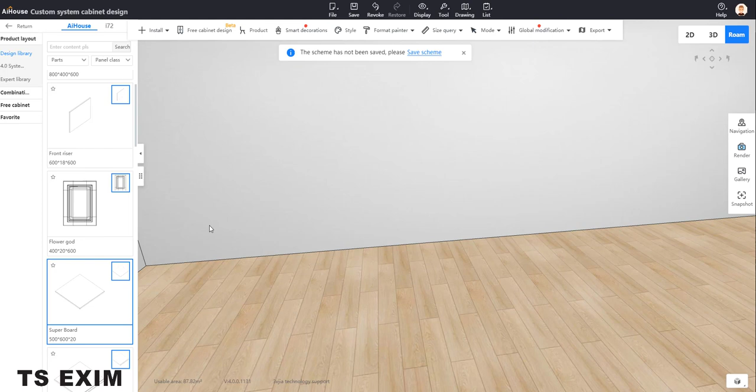You just click here, this one, superboard. You drag the superboard, point on the wall first. Okay, so you rotate it first. Maybe you press X. Select the banner, then you rotate it.

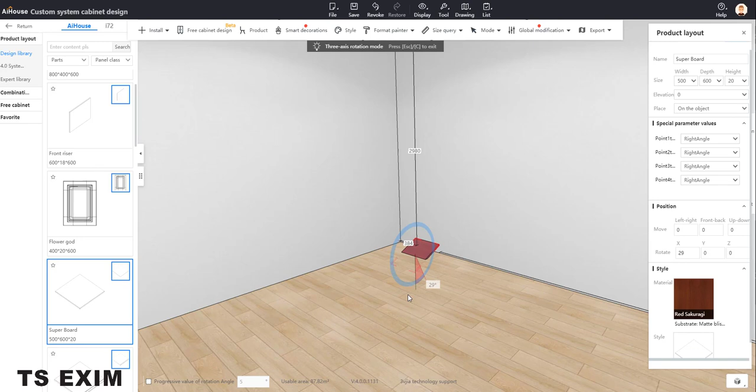Click on red color, rotate it. X 90 degrees. Then press Z to move it up.

So this is the height, this is the depth, right? So this one should be here 500 and 600, so I make it 3000. Right, 3000.

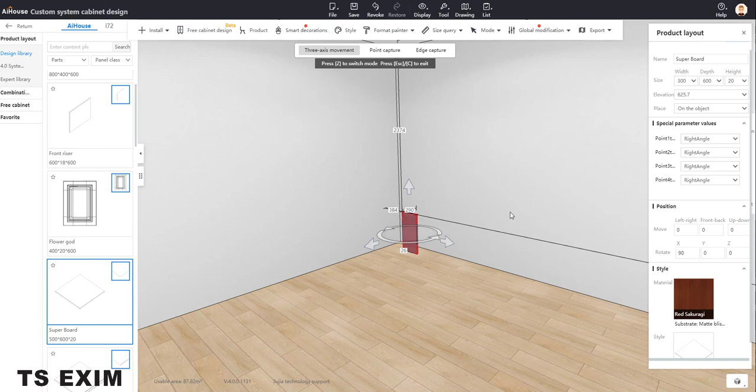Exit first. Okay, the width I make it 3000. Enter. So this one, the depth I make it 3000 also. Get roughly the angle. So this one I make it 0, then you will stick to the top.

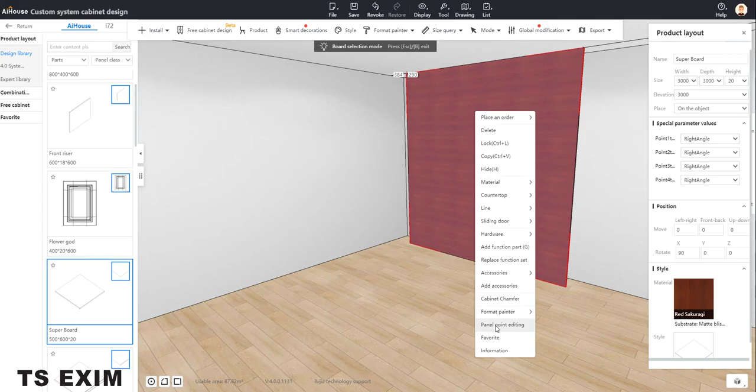Okay, then I'm gonna cut the pattern now. Simple. You just click on board selection. Select it, right click, then go to panel point editing.

In panel point editing, we're gonna use draw, but first just delete this one. Delete the area, then we draw by ourselves. So we click here, then I'm gonna draw from here to here. Roughly the banner, draw the banner until here, like 100. Okay, this is the banner.

You can do here and cut here. Then you see the banner here. So this is the banner, and you can cut the pattern.

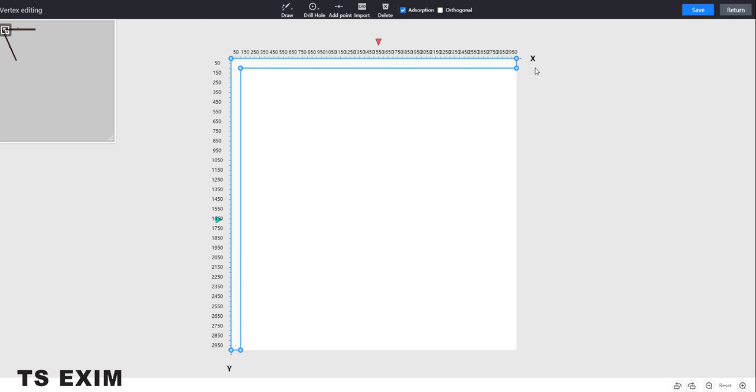So let me check with it first. Okay, the pattern should be here, right? I click back the pattern to check. Okay, it's a curve here. This one is rectangle, I'll just curve these two areas only. So I'll just curve it.

Click here, then you can make curve simple. It's very easy to use. Click here only, so curve already. Then you save. Simple as that.

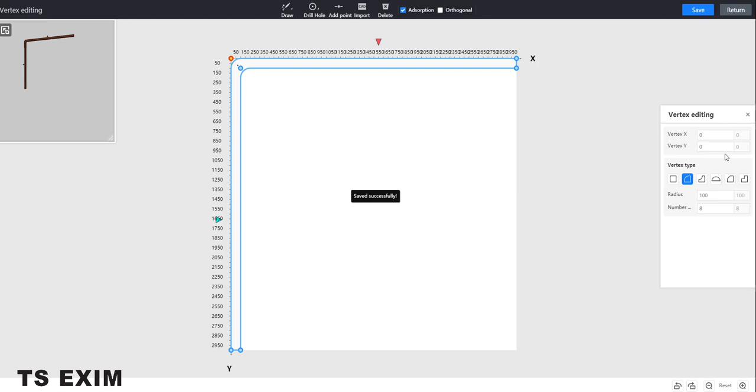Return. So you click on this pen. Exit first. Click on this banner. Make the size, so this one I'll roughly make it 3000 also. Then you can see the pattern now.

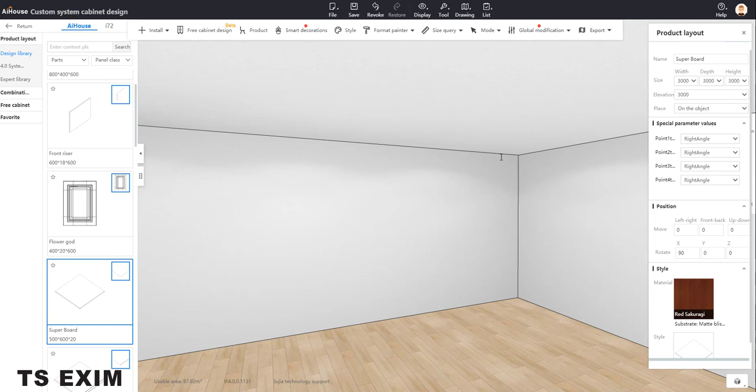So I make it 0, then let it stick to the wall. Okay, this one I make it like 2000. After that, 2000. Simple as that.

Okay, now I'm gonna add another one. Let me check with this. So we're gonna add the cabinet. Add the cabinet, simple, you just drag only.

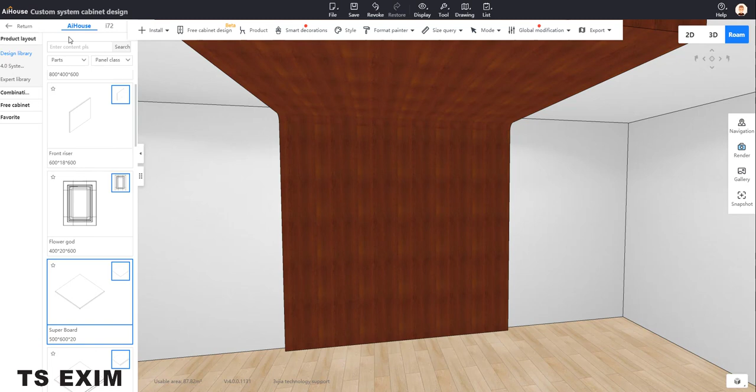Very simple, you click here, basic cabinet. Simple, just drag this one, cabinet. Then you move it first, make sure you're in the right angle first.

So maybe this one I move it, come out a bit. Yeah, so you see the gap, right? And this one banner I put it 100, so I put 100 here, so it stick to the wall. Then you just make it go out.

Maybe this one I put like 2800. 2800 maybe too much, so I make it 2500. So the banner, or the wine cabinet, up to you, what you want to design.

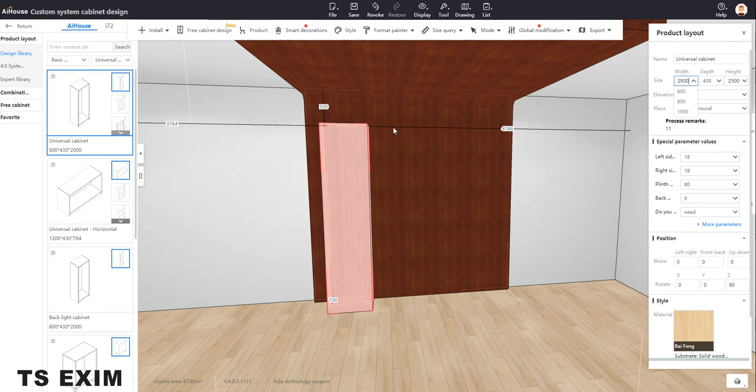So this one 3000, right? I make it 2900. So this one I'm gonna move it a bit. I press Z, move it a bit.

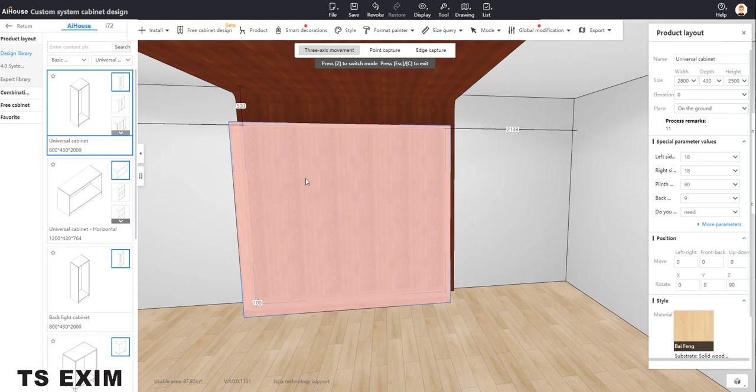2900, okay, maybe 2800. Change it, 2800. Press Z again, move it. So something like the picture.

So here also very simple. You just click on it, right click only, then you can go to this add function part. Select any part you want.

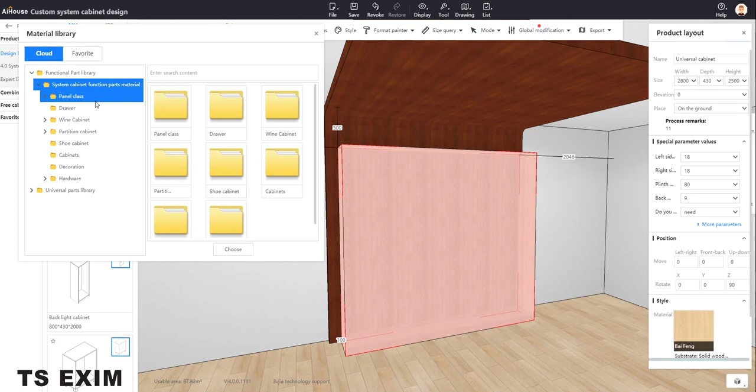So here I divide like 1, 2. I'll divide 2 banner, simply just drag one banner only. Drag one banner, then right click, evenly divide 2. So it's something like this.

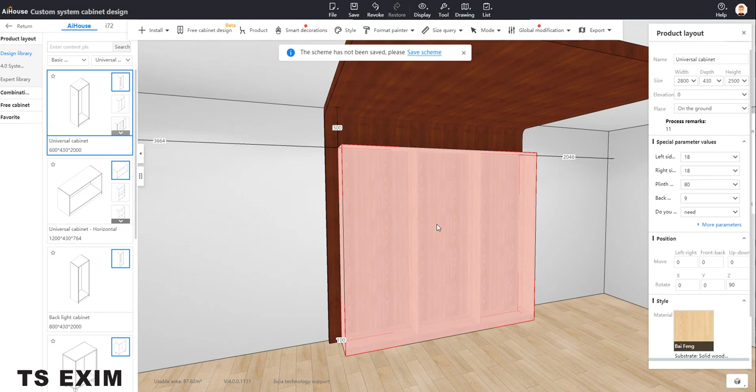Something like this already, 2, and this one I put panel. So here I just put panel, click on it, right click, add function part, drag the panel around here, one panel, and drag another panel around here also, another panel, then drag another panel in here also.

This one you want to make it even, just right click, evenly number 1, so you will stick to the center. The same method, just right click, evenly number 1.

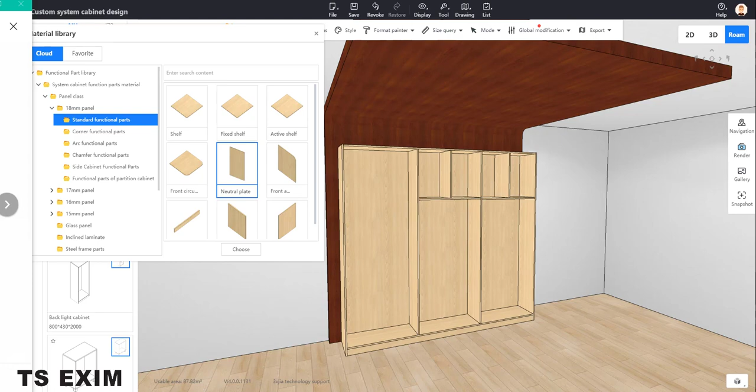And this one, the wine cabinet, right, this one put wine 1, very simple also, just right click, add function part also. So you may come to here, I think should be some wine cabinet here. This is the sample lah.

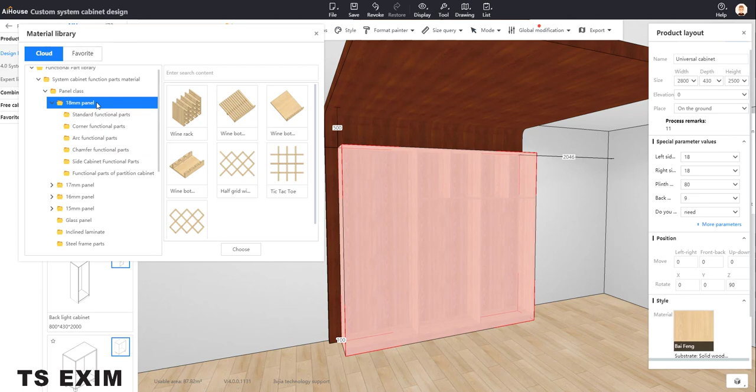Okay, first we just select, we add the banner first, we add one shelf banner, just drag only shelf banner around here maybe, then we just add this, just drag this one and point here.

Point here already, usually it will automatic adjust. And the height, if cannot then just change it the height. So maybe this one, the height I need to extend, maybe I put 500, go up a bit, so 600, go up even more, then say 800, maybe 900, 900 too much, 850.

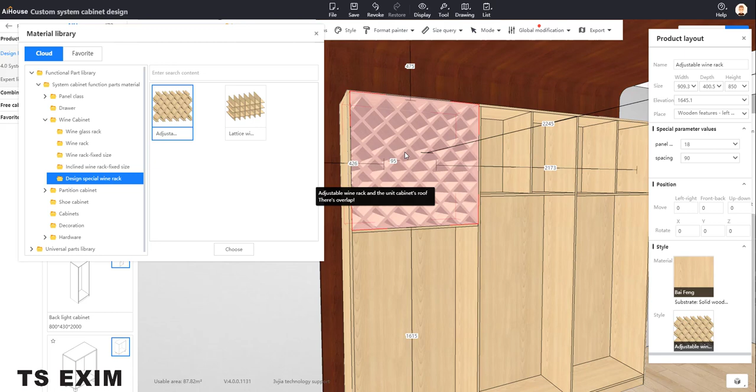Okay, usually you get to know the size, just click here only. Also usually it will show you the size. So just like that, simple as that.